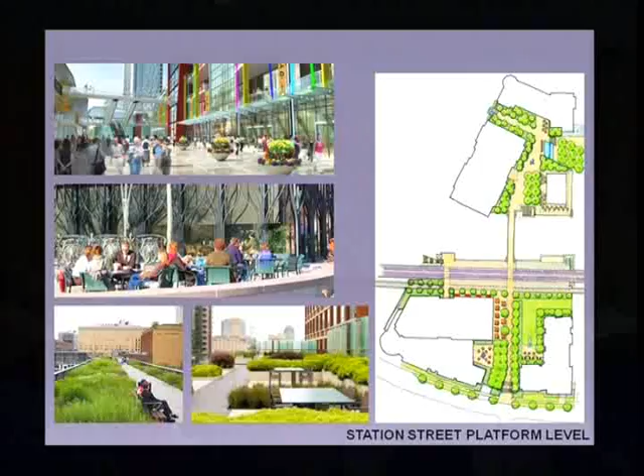Those two blocks show a lot of opportunities to integrate and bring people to that upper level, coming from the north or from the south, serving not only this development but the neighboring communities as people walk to the new transit line.

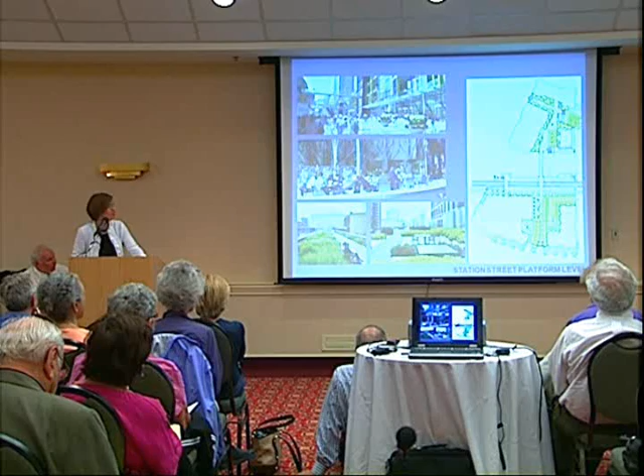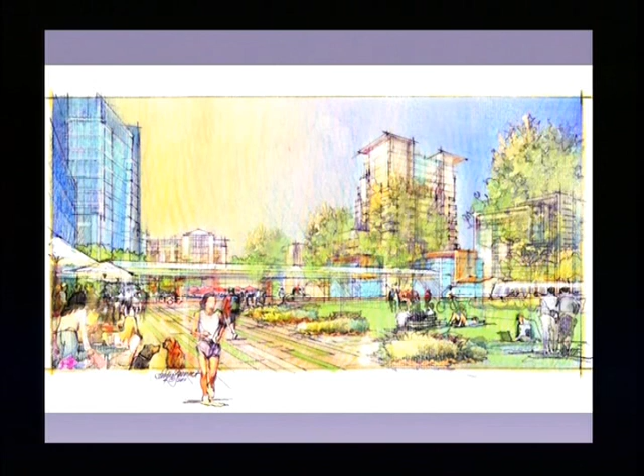You can see that we have opportunities to create those plazas much greener and introduce a lot of green opportunities. This is a view from that plaza. You can see the station at the center with restaurant seating. We have a feature restaurant that could open up with a cafe outdoors, along with the green space I mentioned before.

Lastly, you can see here in red that part of this property is actually within that stream valley buffer. We see the opportunity of creating a much larger system of open space, one that with the enhancement of some trails, seating areas and connections could extend all the way out to Rock Creek and create the Chevy Chase Park.

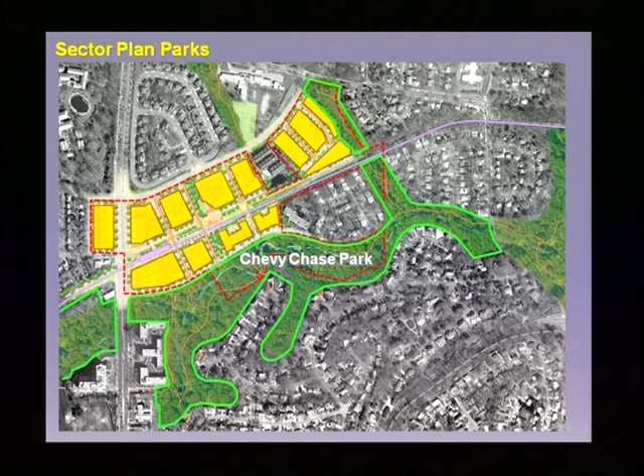The things that can happen there would be trails, educational opportunities, overlooks, and all that can be done while still preserving and enhancing the environmental values of this area.

Last but not least, sustainability has been an integral part of our planning. We have accommodated a number of environmental measures. In these diagrams you can see that we've done it at the street level, which I've mentioned quite a bit as part of our streetscape. It's been very much an integral part of that.

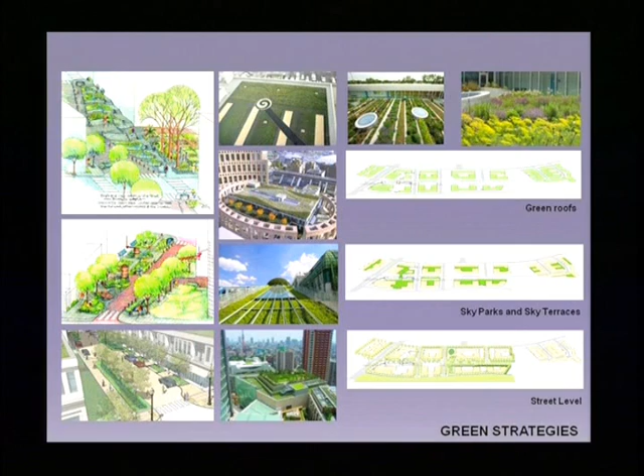As we move to the upper levels, we have a series of terraces and sky parks, some public in nature as described on the transit station, some more private for residential amenities. Those are designed to be green and to store water. At the roof level, we have green roofs, which will reduce the heat island effect and provide additional environmental values, as you can see here.

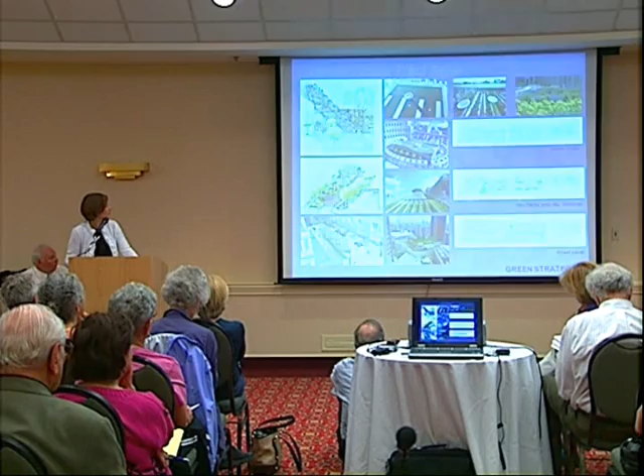In conclusion, before I pass it to David, I want to say that the public realm has been the cornerstone of the plan. It creates a place that is vibrant and delightful, where neighbors can come together, and it will provide the opportunity to reconnect to the other neighborhoods in the area.

As we mentioned earlier, and as Trini walked you through, we really are looking at 10 blocks of development within the 49 acres. Along Connecticut Avenue, we have a small area that transitions into the community, and then we have what we call the four station blocks, where the majority of the denser development occurs.

Within that, you have the station Main Street, the neighborhood Main Street, and the Park Plaza area, which is the central portion of the project. Then you have the Garden District, which is predominantly residential.

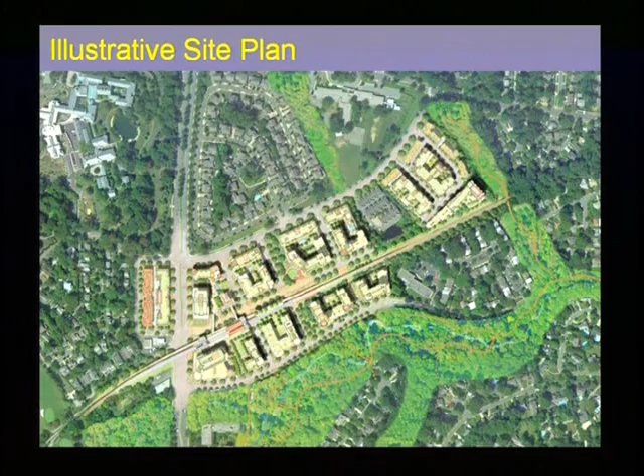The way the station and rail line are designed, the biker and walking trail follows it across Connecticut Avenue, elevated as well. However, there will be opportunities through our street and block grid to allow that to just as easily be an at-grade crossing at this intersection right here.

So you'll no longer have to come here, go down, cross, and then go back up. You can cross here as well as walk across on the bridge system as well.

So from a programmatic standpoint, how does that begin to lay out? I'm going to go layer by layer and then show you a comprehensive plan as we go through. And don't worry, I'll show you some renderings as well that you can be amused by.

Starting with street retail, we're looking at about 200,000 square feet of retail, and we believe it can be a combination of recreation retail, entertainment retail, dining retail, and community-serving retail.

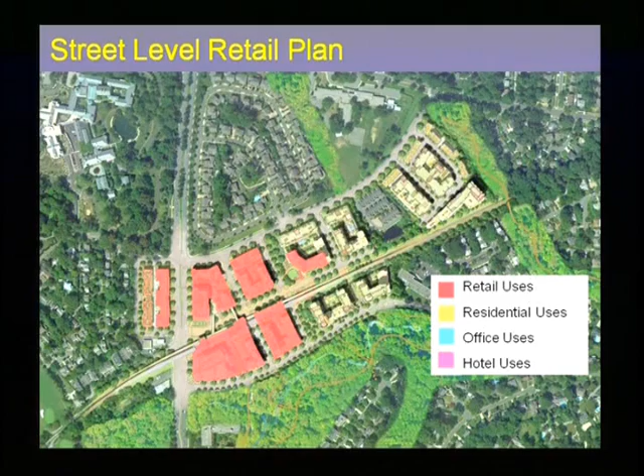And that can be a variety of different kinds of tenants from that standpoint. We believe that it's important to have it along Connecticut Avenue, and we believe that we can drive the retail into the area about 2 blocks consistently.

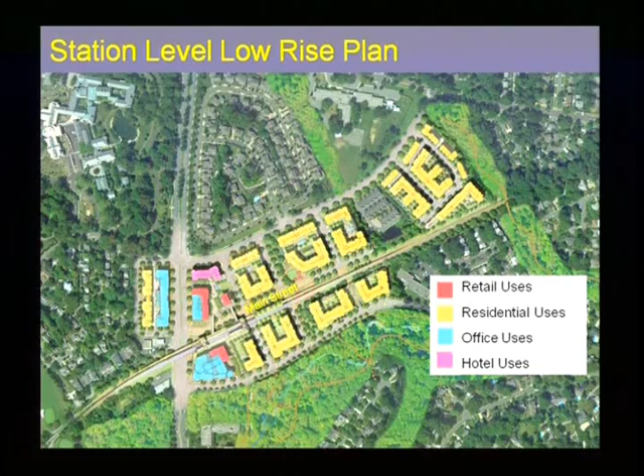So then the next level up, we're calling the station level. The station is right here. The bus drop-offs will be at grade on Main Street and on the North-South Street. At this level you begin to see a lot of residential play into the equation, and just a little bit of retail. It's very difficult to get retail up on those second floors, but we believe we've got an opportunity here because of the station that we can locate maybe a specialty restaurant at this point that overlooks Main Street, and also do some transit-oriented retail like a Starbucks, or an Einstein Bagel, or a news stand or something like that. So there's a little bit of retail on this level that begins to associate with the office.

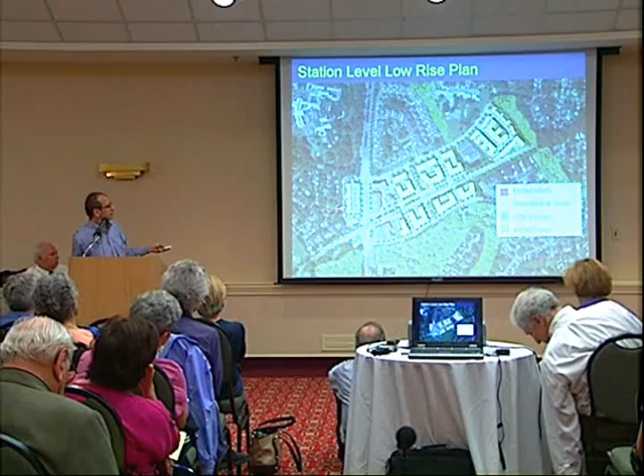Across Connecticut Avenue, we're proposing professional office above retail, and then a townhouse development that faces the existing residential community. In this case, the existing residential community is uphill from us, so it will not be intimidated by the residential development here. The same thing goes for across here. The topo is going from high to low, and that allows us to get underneath the rail line and to connect the roads together, as Trini has already mentioned, and that's why you begin to see some of that topography working there.

We then go back to the station level. The station is right here. You can begin to see that the bikers and all that are integrated at this level, as well as pedestrians that might be coming out of the office buildings for lunch, dining in the specialty restaurant across the way. That's the hotel up at the northern corner of the project. You can begin to see how the high-rise buildings are stepping down to low-rise buildings at the north side of the property.

Then we get to the mid-rise levels, and you begin to see that we've already maxed out the heights of these buildings. These aren't mid-rise buildings, these are low-rise buildings. We've already maxed out the height of all of these. They're not mid-rise buildings, they are low-rise buildings. So the mid-rise components of the project are in the area around the station and in areas that are buffered from the adjacent community. You begin to see the office buildings and the hotel grow out of the base from that standpoint.

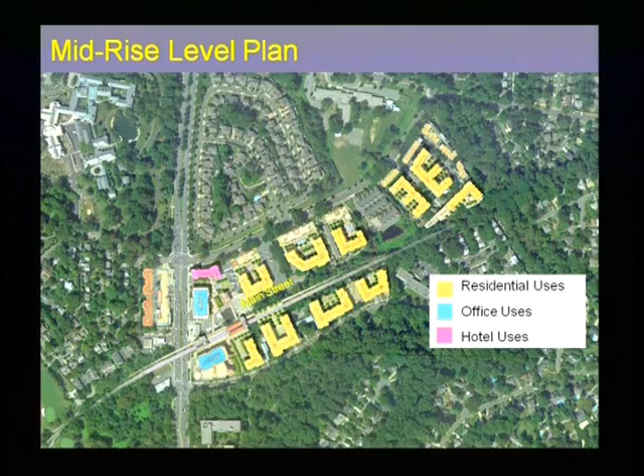So here's the park, the park that Trini described. We're going uphill to Manor. That's the walled residential community to our north, and there's the terracing of the landscape and the preservation of the existing trees. Once again, you begin to see how the residential is stepping down in height from high-rise to mid-rise to low-rise.

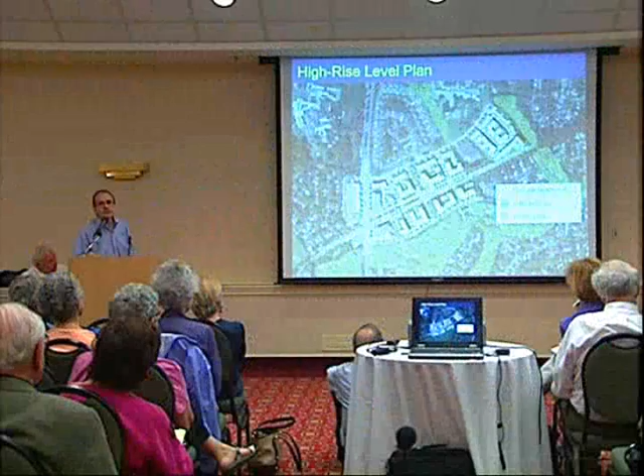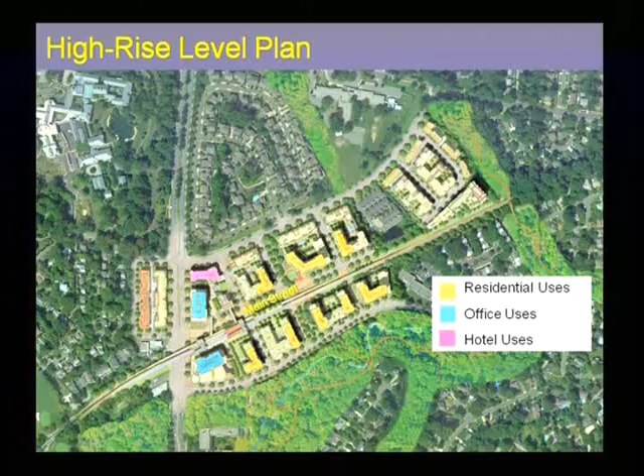And then obviously this is the high-rise. Once again, you begin to see that the high-rise buildings are kind of like point towers. What we really want is that as you're in your community, let's say you lived in this neighborhood over here, the only buildings that you potentially could see would be the various towers that rise above the tree canopy. So as you're standing in your front yard, with the forest and the maturity of that forest, you'll really begin to see that you won't even see a lot of this development except for the very tallest point towers that rise out of it.

The dark yellow are the high-rise: 1, 2, 3, 4, 5, 6, 7, 8 residential buildings that grow out of up to about 8 to 10-story bases from that standpoint. And then the office buildings come out along Connecticut Avenue, and the hotel is that as well. But you can begin to see, here's the forest. Here's the existing classic residence, which is a 17-story building, and the existing condominium here.

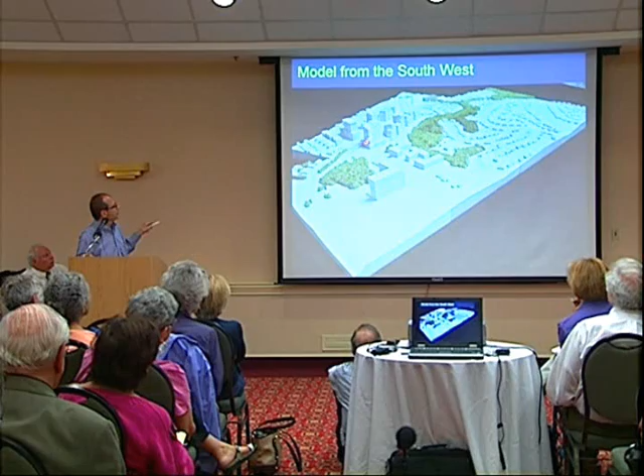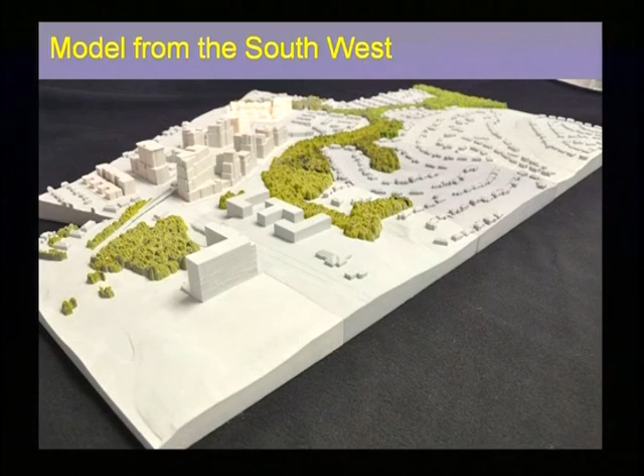And so here's the office building. The purple line is rising over Connecticut Avenue. Here's another office building. And you begin to see the residential towers grow out of the base of the building. So this is taken from the southwest looking to the northeast.

So what's the summary of the program at this point? As I mentioned earlier, 200,000 square feet of retail, mostly street retail, dining, recreational, community serving. 3,000 residential units in various forms, heights, and products. A 150-key hotel, specialty service, community-oriented. It's not a conference center hotel or a convention center hotel. It will be a select serve with a specialty to serve the community from that standpoint.

900,000 square feet of office, with a component in professional office and a component in corporate office. You'll have those kinds of varieties all above the street retail. So at the street level of those office buildings, you'll have predominantly retail with entrances to the offices at the street level and on the station level.

And then we have the building heights. Now I want to slow down a minute and begin to show you what we're talking about. Some of these numbers are probably a little hard to read out there, and I'm sorry for that. So this is the eastern section.

And of course this is the station here. So I'm going to start back here. This is the eastern section. We're looking at 4 stories up to a 10-story building back here, a combination thereof. Some of this will be townhouse kind of development at the perimeter, and then this will be what you'd call platform multifamily, roughly 4 to 5 stories above or wrapping around a parking deck. This building would rise a little higher than that because it's right down on the purple line.

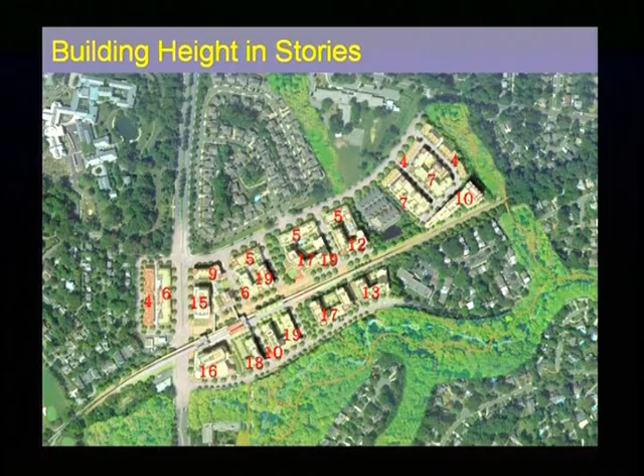We've got a group of townhouses here in the middle, and we have an existing community that's really downgrade from everything. We're looking at stepping buildings starting at 5 stories, a typical wood frame, stick-built market across from the single-family residential units. We would then step up to where we're along the purple line, up to as high as 19 floors. As we move towards the station, we also have 19, 18, a 15-story office building, a 16-story office building, stepping back down to a 6-story professional office building with a 4-story townhouse development on the back side, stepping back down into the community at that point.

So in essence, the concept is—and these things can be moved around a lot, because we are looking at how we arrange the program across the site—but the idea is to respect the community here, to look at the compatibility of the community here, and really build from a low rise along that edge to a high rise in this area, and where we can afford to, build predominantly mid-rise residential components with high-rise point towers.

What about the community at the bottom? We'll get to questions at the end. You certainly can ask those questions in a minute.

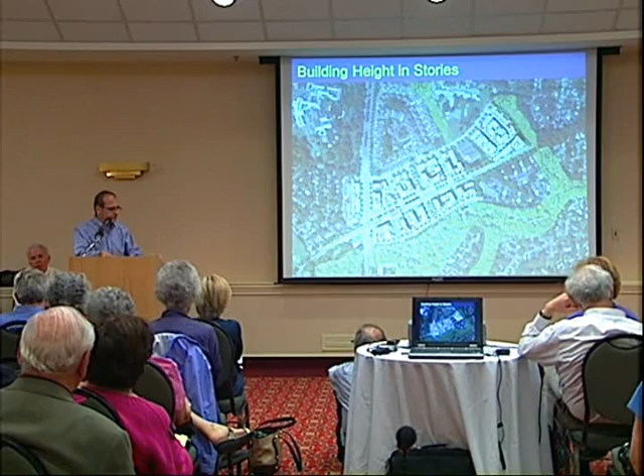So come back in summary, let's look at how that all plays out with density. We've got 379 acres within this sector plan. We comprise 49 acres. Here's the program I just pointed out to you. It comes to roughly 4,300,000 total square feet, the majority of it, 3 million square feet, being residential.

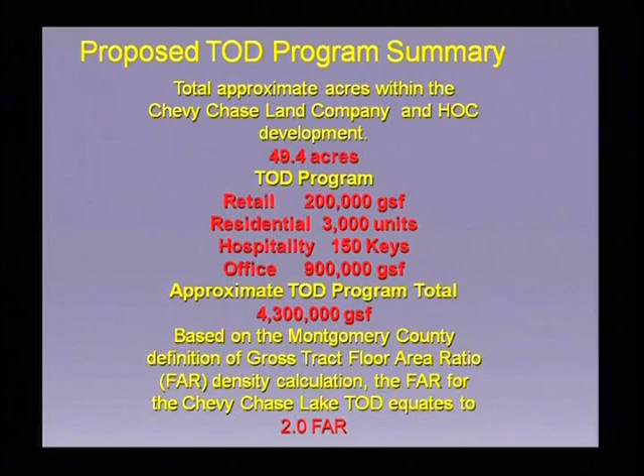Okay, 3 million square feet of that is residential. Based on a floor area ratio of a gross tract area, the way we measure it in Montgomery County, that comes to an FAR of 2. If you look at it comparatively, we just got through giving the White Flint area roughly a 6 floor area ratio. Do you need for me to explain what floor area ratio is? Are you okay with that? Okay.